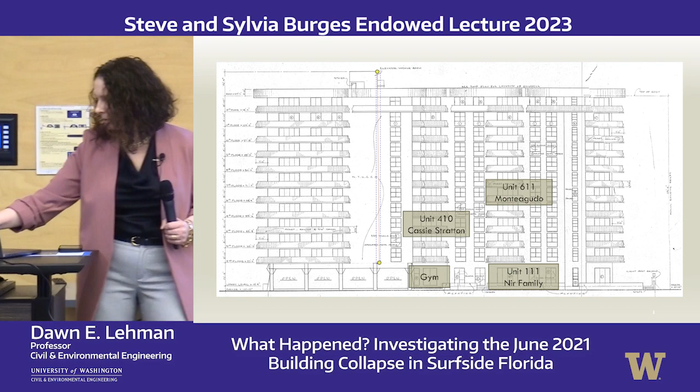Around 1 a.m. in the morning, the Nir family had just gotten home. They were a particular sect of Orthodox Judaism, out celebrating the high holidays. When they came home, they were hearing some strange knocking noises. Sara Nir, the mom, lived with two of her children, and Gabe Nir is one of them. The security guard also heard these strange knocking noises.

At 1:14 a.m., so they were hearing this between 1 and 1:14 a.m., there was a couple who split their time between Argentina and Miami. They're actually telenovela stars, and because my colleague Sarah Blaskey understands Spanish, she knew what they were saying. They did not want to be interviewed, so I want to respect that. But what's important is they drove into the garage at 1:14 a.m. They didn't see or hear anything, and they took the service elevator up.

When they took the service elevator up at 1:15 a.m., they got lucky because the service elevator always stops at the first floor. As soon as that elevator reached the first floor, they heard this thunderous clap like others did, and that was essentially when the pool deck collapsed. You can see this is the tower, this is where the people live, and this is the pool deck. These red dashed lines indicate the extent of what we can see, which is important as we try to understand what happened. We don't exactly know what happened as we move towards the tower because that's where the rubble pile is. At this point the pool deck fails, and Gabe Nir and Chani Nir, who are in Unit 111, actually move and run out.

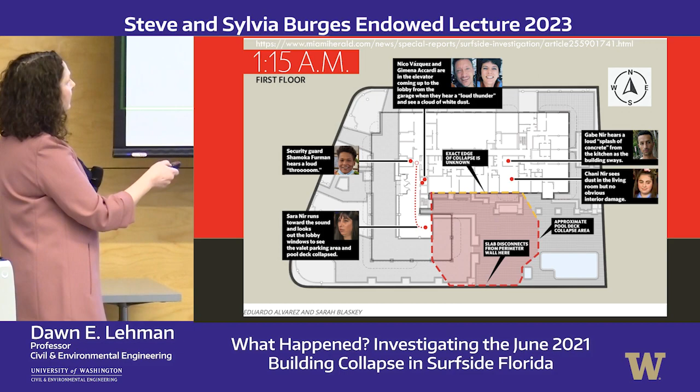The security guard hears a loud boom. Then Sara Nir, who was talking to the security guard to try to figure out what those knocking noises were, runs south, and she comes to a place on the first floor where you can see out, and she saw the pool deck collapse. You can see everybody on this first floor who heard this exit the building.

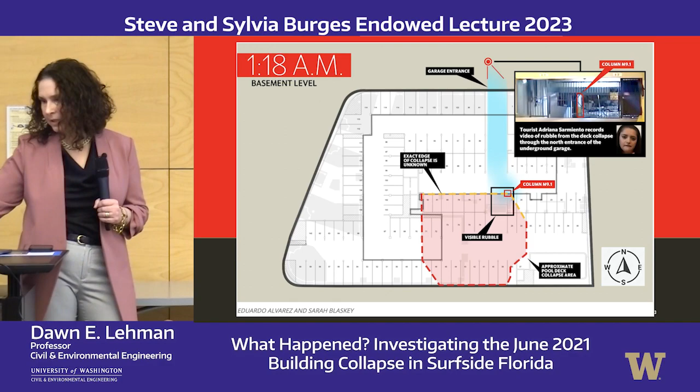Then, to confuse all of us, there was a video -- I think it was on TikTok, but I can't be sure. Social media has become incredibly important for these journalists. There was a woman just to the north at a hotel who had taken out her iPhone and took a video into the garage. You can see what looks like water, and concrete rubble on the ground. Until we understood this collapse sequence, we thought that maybe that had actually failed before the pool deck failed.

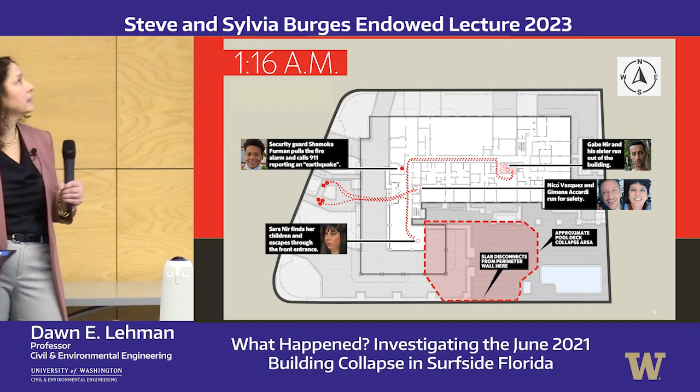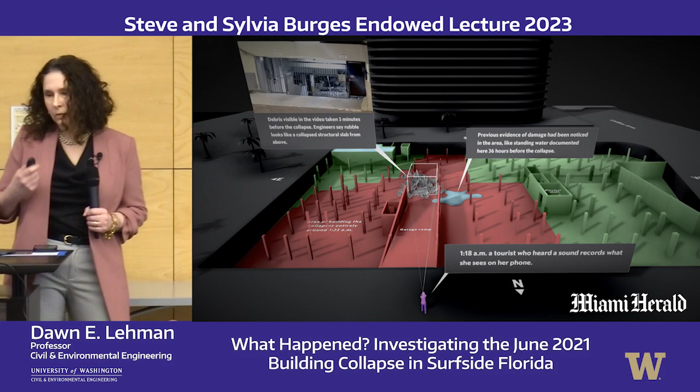At 1:16 a.m., as they leave -- this is essentially looking into the building, from the Herald. You can see that rubble we had seen before. Over the years there had been a lot of reports of water intrusion, which is going to be important when we start thinking about how that impacted the failure modes.

At 1:20 a.m., Cassie Stratton, who was on the 4th floor in that tower right above the gym -- which is going to become important -- called her husband to say, 'Oh, I'm so glad that we didn't leave our cars in the shop because the pool deck caved in. There's a sinkhole.' I think that's a fair way for a layperson to describe it. What she told Mike Stratton was that as the pool deck failed, it was coming towards her, which is also important.

The other thing we learned when Sarah and I talked to Mike Stratton is that there was a building just to the south of this building, with an easement between the two buildings, and that sprinkler or irrigation system kept watering this portion of the pool deck. So it was just to the south of the pool deck, but it was watering the pool deck. Again, this whole concept of water intrusion through the pool deck is going to become important, especially as we try to understand what might have happened.

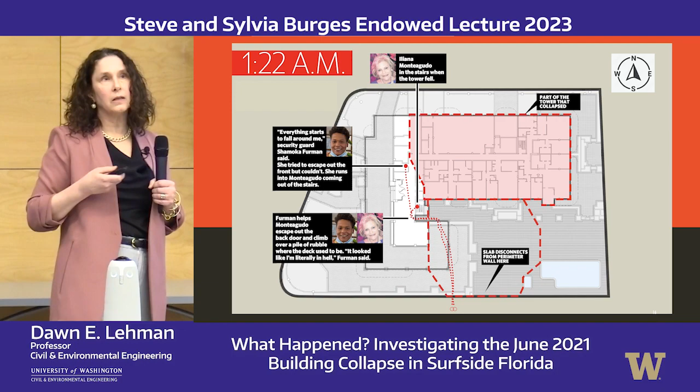Then at 1:22, two minutes later, the tower collapsed. It collapsed through this portion of the building eventually, and the whole eastern tower collapsed. The western tower remained intact. There's a structural wall here -- I'm sure most of you know what a structural wall is, but if you think about something very wide, high, and thick, that wall can provide quite a bit of stiffness, especially with wind loading, which is important in this region. So that wall remained intact, but the rest of the building failed.

There's another wall that we'll look at in a minute. You can see that when the security guard helped Ms. Monteagudo leave, they couldn't actually get out the front, and they had to weave their way out.

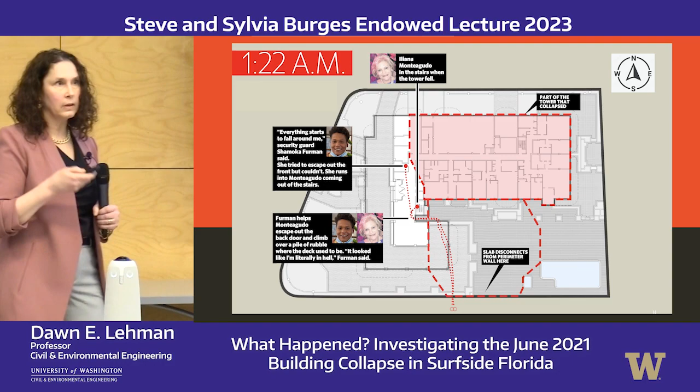And that also becomes important as we look at damage in the building. I've put this up here because this is not an engineering aspect, but it is an unfortunate truth of this tragedy, which is that because the security guard was not trained in using the alarm, and we know there's 7 minutes between when the pool deck collapsed and when the tower collapsed, most likely people's lives could have been saved. If you heard at all about the lawsuit, a part of the settlement was with the alarm company. I just want to point that out.

If you're interested in learning more about any of this, the Herald really has done a great job on that.

Okay, so we have a timeline. We know that there were 7 minutes between the pool deck collapse and when the tower collapsed. And we know when the pool deck collapsed, it was moving towards the tower, not away from the tower. So I still haven't told you what happened. You still don't probably have an idea what happened. We're still sort of here, right? Except that we know that this pool deck collapsed first, and it progressively collapsed towards the tower.

So in order for all of us to think about these things, I want to use some information that I know, and anybody else in this room who's a structural engineer and understands reinforced concrete knows. This happens a lot after earthquakes, and a lot of you might know I have done most of my research in earthquake engineering. It might have seemed strange that I decided to take this on. But one of the things is, I studied this building with a colleague of mine who's here, Laura Lowes, and we tried to understand what happened to this building.

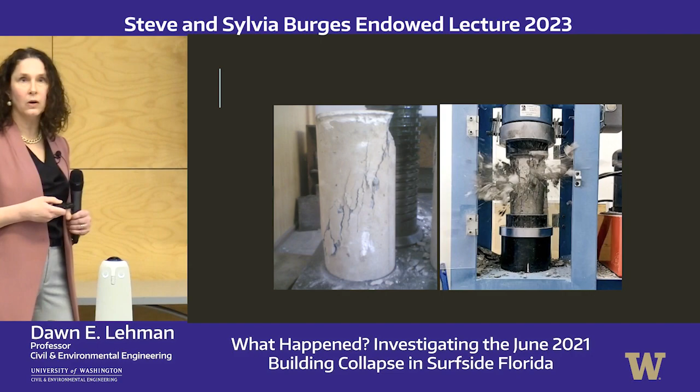So the first thing we know about concrete is that it's good in compression. This is a cylinder—we like to test concrete cylinders to figure out the strength and the stiffness. One interesting thing here is, in addition to these vertical cracks, you can see there's this diagonal pattern, and that will become important. The other thing to know is when concrete fails under a compressive load, it can actually be quite explosive. So we don't really want that to happen.

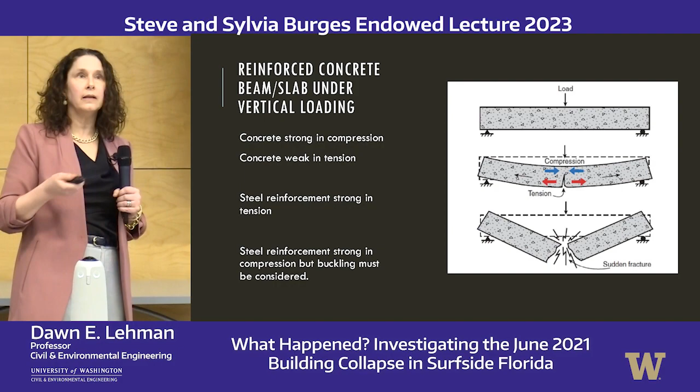So what should we do? Well, a lot of times we like to use structural members so that they carry load. For example, this roof—somebody needs to be able to design this for the load we expect, especially the dead load, which is the self-weight, anything that we know is going to be in the structure permanently, and live load, which are unexpected weights: furniture, people, equipment, etc. So we tend to have something that spans between maybe 2 columns.

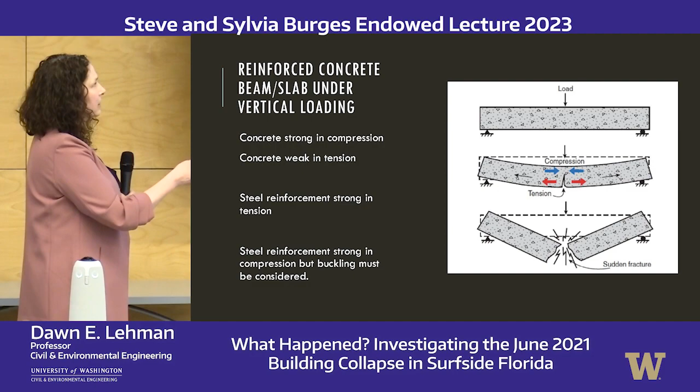It has a load on it, and the top here is in compression, and the bottom's in tension. It's not always that way. But as we said before, since concrete's not good in tension, it'll just break through. So what we do is we consider how these forces are being carried, and we actually place steel where the tension demands are. You can see here, this is a beam being subjected to that same point load. The compression forces are at the top, and you can see there's some damage here. But in the tension forces, you can see there are these cracks that are vertical, and we place the reinforcement here to take those forces and also to keep those cracks closed. And that's also important when we think about corrosion.

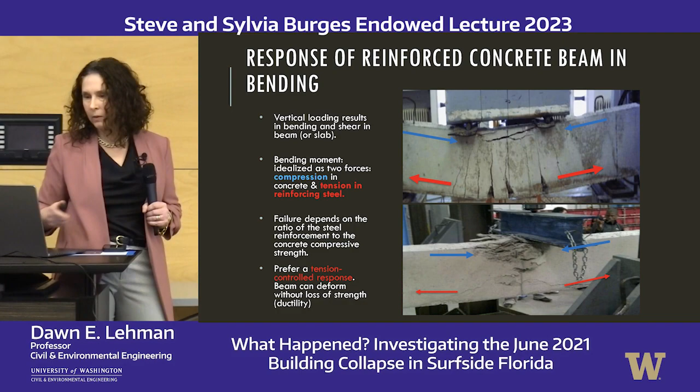If we had so much reinforcement, such a huge area, really strong, then we might end up actually changing our failure mode to compression, and we don't want that. So in general, anything that's bending, a beam, a slab like this, we will see cracking, and we'll place our reinforcement to sustain the tension.

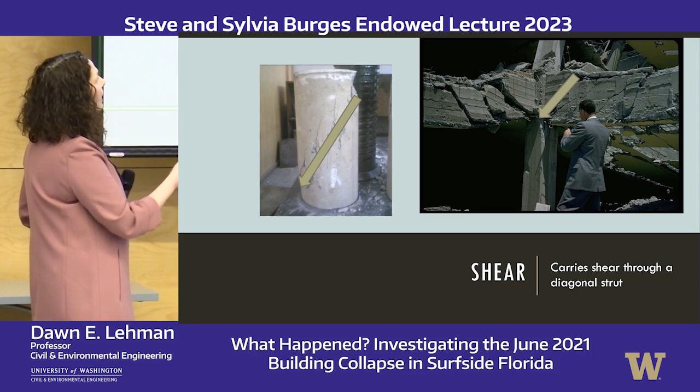The other aspect of concrete that really is not welcome is shear. I talked a little bit about this diagonal strut, because one of the ways concrete carries compression is through strutting action. You can see here, this is a column that failed after an earthquake, and you can see these diagonal cracks that are very open. But you can't carry tension perpendicular to the crack because the crack's open, so you need to carry compression along the crack. That's how we carry shear in concrete typically, which is also going to become important.

The last thing I want to talk about is bond. What is bond? Well, if I have concrete and I put steel in it, I need to transfer those forces between the steel bar and the concrete. If you've ever seen a reinforcing bar, you might see that they have what we call these deformations. Those deformations are there to transfer the force from the steel into the concrete and vice versa. So it's almost like another material. The concrete has a strength, the steel has a strength, and the bond also has a strength.

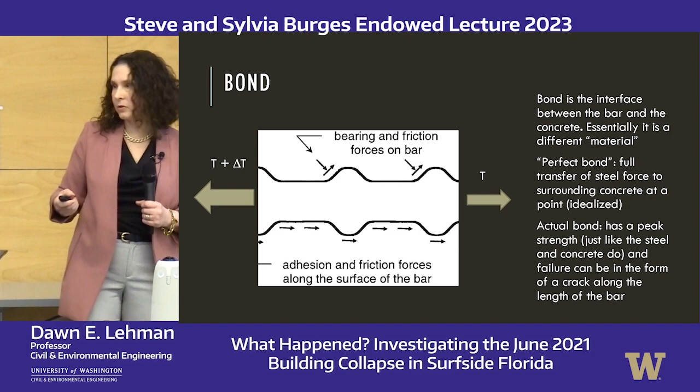And if you have high bond demands, you will run into trouble. So you need to have bars that are long enough that allow that transfer to happen. And maybe if you start running a lot of water through this slab or this beam, the concrete properties might not be what you assumed in your original design. Now, I don't know that, but that is possible.

The other place we need bond is when we want to fully anchor this bar, right? So maybe you've seen after an earthquake, we will have vertical bars from a column going into a foundation, and if those bars aren't long enough, they will just pull out and allow that to move over. So these connections are going to become important.

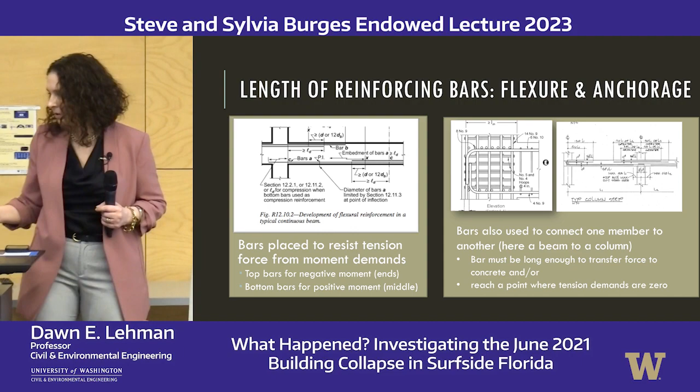So, compression: concrete's good in compression, stiff in compression. Tension: anytime we have tension, we really want to have an orthogonal bar to the crack to take those stresses, keep those cracks closed. Also bond, making sure that the bar is long enough to fully transfer the force from the bar to the concrete, and also shear, which concrete likes to carry at an angle. There—everything you need to know about forensic engineering of concrete, right there.

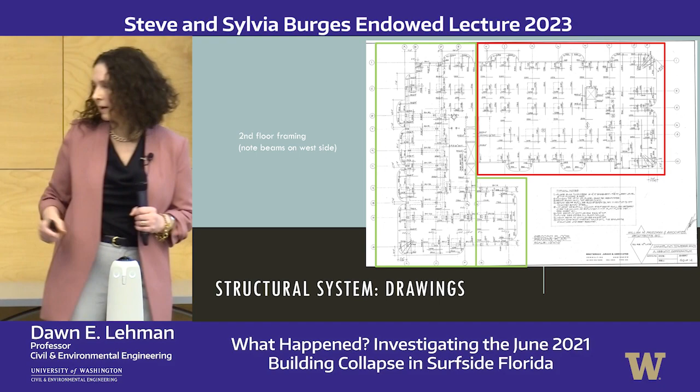What kind of system is this that's holding this building up? Well, it's called a slab column system. It's essentially a flat slab—I'm showing that above, and a column below, in a drawing and a sketch.

In addition, sometimes we will use beams. These beams help to strengthen, but they also help to stiffen. Have you ever been in a building, or especially sometimes at the airport, and you can feel the floor vibrating? Turns out people don't like that. It's not going to fall down, but people just don't like that—they don't like to feel the floor vibrating. So a lot of times when we design something like a slab, we actually design the thickness to make sure that we don't have those kind of vibrations.

So not everything is designed for strength. But typically, when we design a slab column system, we want the slab thickness to be a function of the bay width—that is, the width between these two columns—because if that gets longer and the slab is still thin, it's going to deflect and it's going to crack. Those cracks are going to open.

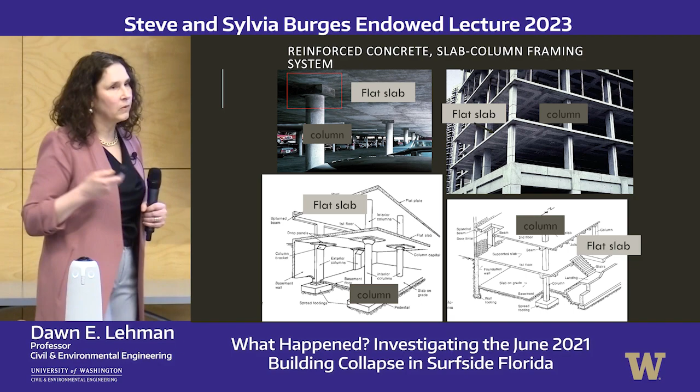Doesn't necessarily mean the building's going to fail, but it's not going to be serviceable in the long term. So sometimes beams can help you. The other thing is that we know slab column connections can be weak, so sometimes we'll put additional reinforcement and concrete around that in the form of what we call a capital. That didn't happen in this building. So it is a slab column system, and there are some beams, but not that many.

This is a drawing. I'm sorry if this is the first time you've ever seen a structural drawing, but this is a plan of the building.

It shows this exterior wall. This exterior wall is a perimeter wall, a retaining wall. It keeps the soil out—sorry to the geotechnical engineers, we just don't like soil in our building. So we have this retaining wall, and that's going to become important.

You can see I've shown this southern retaining wall in blue. That's one of the most important components for us to look at. This is the core wall I was talking about before. You can see it's in the north-south and east-west direction. There's also a stairwell wall in the north-south direction.

These columns are larger—this is in the portion of the building that remains standing. They're 2 feet by 2 feet. These columns that are just supporting the pool deck are smaller, and that's what we'd expect, because these columns are carrying a full building on top, while the pool deck just carries its own demands. Remember, there's a garage underneath there, so those are just one-story columns.

Now, there are some larger spans, anywhere from 23 to 28 feet. I will say these clearly are not the drawings that were used to build the building. How do I know that? Because this is not what the pool looks like over here, and there's no jacuzzi.

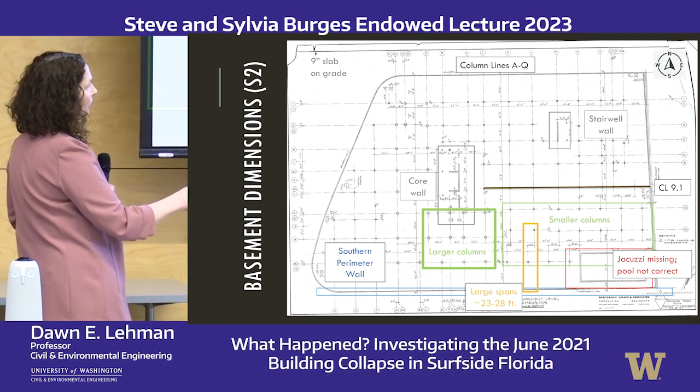And this column line here, 9.1, is very important. We know that because it's framing the perimeter of the tower to the south. So this is the delineation between this pool deck region that we know failed first and the tower itself. Those are the important aspects of this.

I'll refer to that column line, 9.1. I might call it the perimeter beam because there is a beam there. Like I said, these slab column systems do use beams.

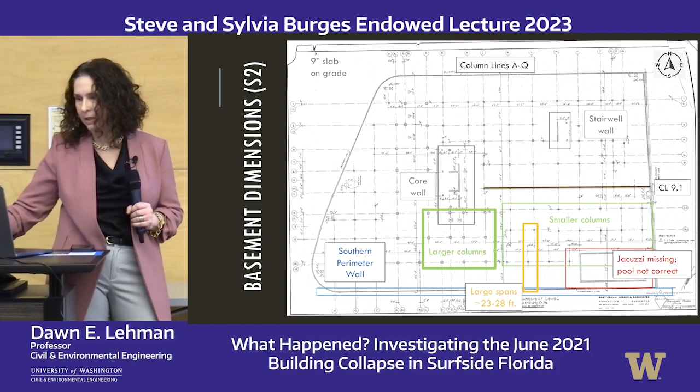This is the level we're going to end up focusing on—level 1. Why am I focusing on level 1? Because that's where the damage initiated, and also that's where I can see structural components, unlike the rubble pile where I really can't see much at all. Again, the column lines are the same, and this is the region of interest where the pool deck failed.

This is a 9.5-inch slab, and I will tell you that a 9.5-inch slab is not thick enough for these spans. So just out of the gate, without checking anything or doing any fancy analysis, we already know this building is under-designed—and I'm sure every engineer who went through knew that too. But it's not easy to thicken a slab in an existing building.

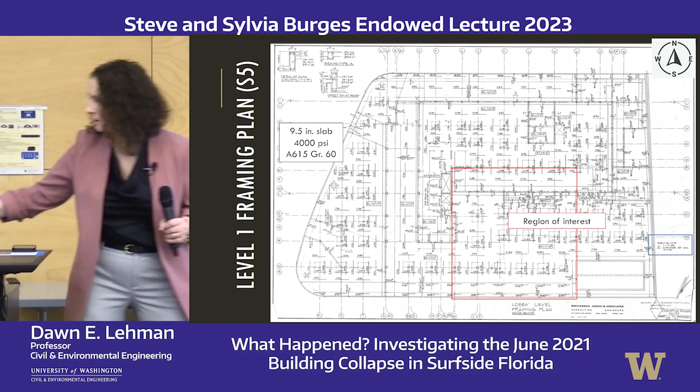The other aspects that become important for us are the connections. Remember when I was talking about bond—we want to anchor these connections. One interesting and important thing to note is this slab is actually connected to this exterior wall intentionally. Whether or not they actually used it in their analysis, I don't know. This building was built to a 1977 code. Clearly things have changed since then.

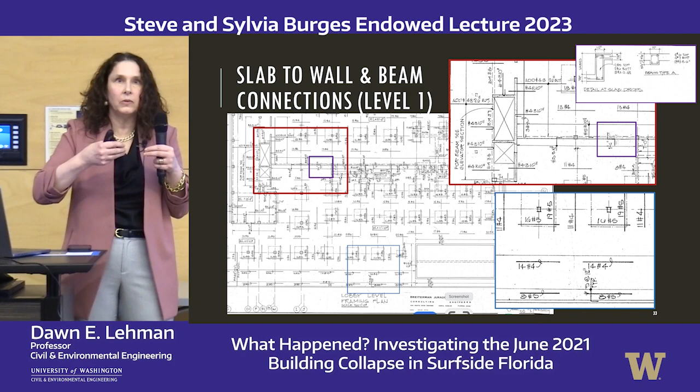You can see here there's a big square around the column. It looks like that might be the capital, that thickening I talked about before, but that's not actually what that is. That's telling the contractor that the reinforcement denoted within that square—25% of it—should go through the column each way. That's really important to connect that slab to that column. So these connections are important for us.

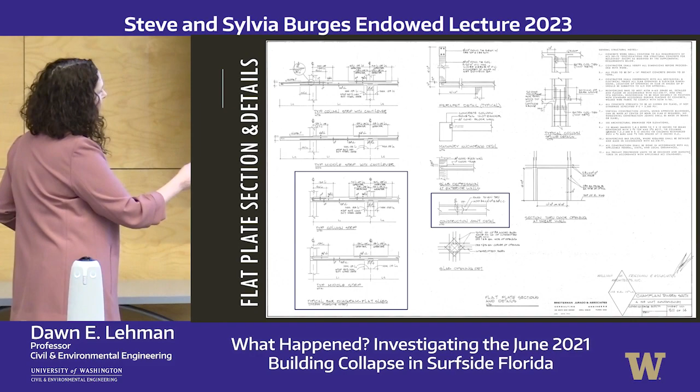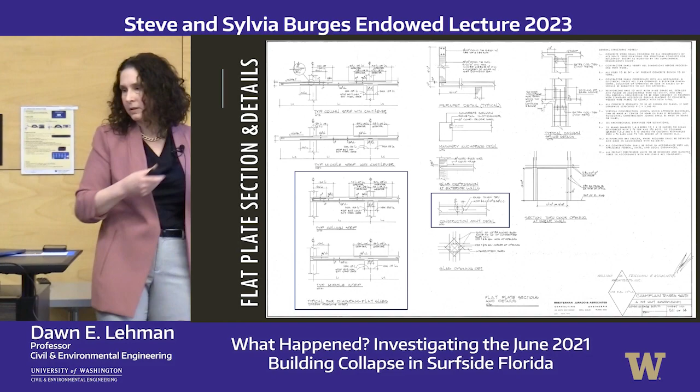This is just a detail of the connection. You can see here, this is the slab connecting to either an exterior wall or a column, and you can see that they've hooked that bar. They hooked that bar so that we have that anchorage—so if something happens, the slab will still stay attached to the column.

Okay, now we're going to get into the interesting stuff. Now that we're all educated, all at the same level, we all know how to do this. So the first thing we want to do, now that we understand the drawings, is look at the building.

There were so many people during the height of COVID who were called in to do a rescue effort.

The same thing is happening in Turkey right now. Structural engineers are very integral to being able to take apart a debris pile so that the people doing it remain safe. I'm just very grateful to those people for doing that.

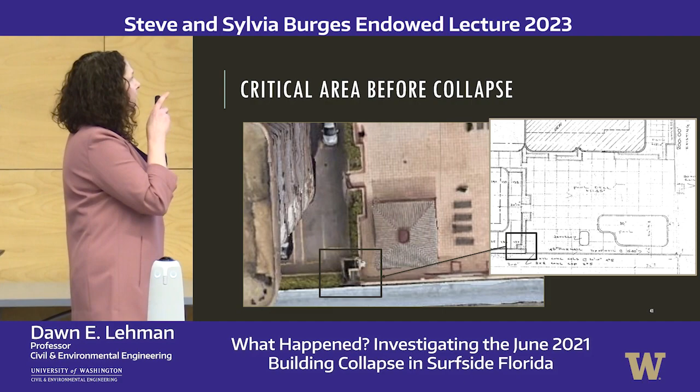Okay, so here's where we really want to start trying to understand what possibly could have happened. Notice here, and this pool - I don't know if you read about the pool, people said the pool's corroded. Was the pool corroded? Yes. But the pool's still intact, and this whole portion of the pool deck is still intact. This portion of the pool deck collapsed, even though the connections here and the connections here are the same connections. So it can't just be the connections - something else must have happened.

If I look at it from my point of view, having gone through these photos a lot, I see that the slab has detached from the southern perimeter wall, so that continuous connection has failed. There's a strut - remember how we said concrete likes to carry forces through struts - so it's strutting to a wall in the jacuzzi, which does have a thick wall. That angle continues until the extent of the damage region runs north-south, and I think there's a construction joint there. What's a construction joint? I forgot to tell you that.

Okay, this is the bonus in the class. So a construction joint is when you cast part of a slab - you're not going to be able to cast the whole thing at once, and you want to cast the next part, so there's a joint between those two castings, and usually we put reinforcement through there. So we will look at that.

You can also see all of these white ellipses - those are columns sticking up through the slab. Remember, there's a garage underneath here, so that slab has fallen. It probably hasn't fallen all the way down to reach the floor of the garage because this is Miami, right? These people like their cars, especially their white cars. So one of the reasons they make this site big is that they want to have a parking space for every unit. And over here, I can see there's this brown paint - this color is all over Florida, I don't know what to call it, but they seem to like to paint everything this brownish, pinkish color. So that's above level 1, and this white part is below because that was part of the garage.

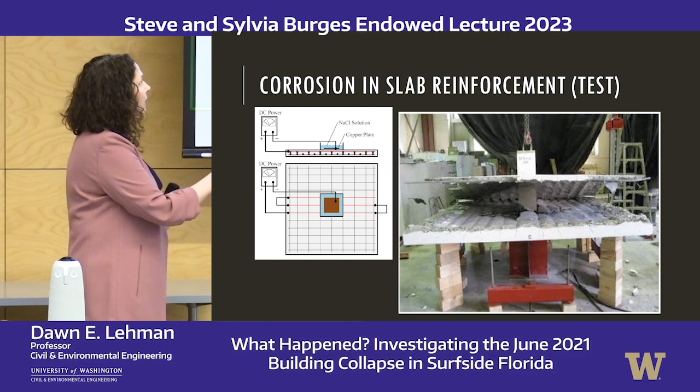Now I'm going to try to incorporate a little bit of testing to show what happened. Somebody took a slab in their lab and built themselves this basically salt bath, and they corroded these bars. When they corroded the bars, you can see what it looks like—there's essentially a failure plane, a horizontal failure plane, because those bars were corroded. Same thing here, might be hard to see.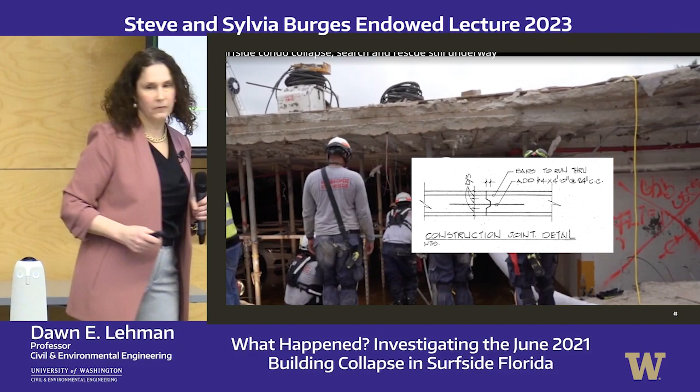So it does seem that there's the potential—and this is the other side, the western extent—and again you can see that same sort of damage mode where these bottom bars have pulled out. One of the things we do in reinforced concrete is put a concrete cover beyond the bar to prevent corrosion. Unfortunately, when this building was built, the cover required within this garage was only 3/4 of an inch. It was not enough to keep these bars intact and prevent them from corroding.

The last thing I want to talk about here is this connection—this is a pretty well understood damage mode where the slab has detached from the column. This is just an example from an experiment, and you can see when they cut it apart, there was this diagonal crack that we had talked about before, right? Compression—concrete likes to carry compression through that crack—and then this horizontal crack, which is sort of like a plane of weakness. So you can see there aren't any bottom bars here, so there's really nothing to keep that slab connected except potentially the bars. But you can see here that, again, there are bars attached to the column and they slipped off.

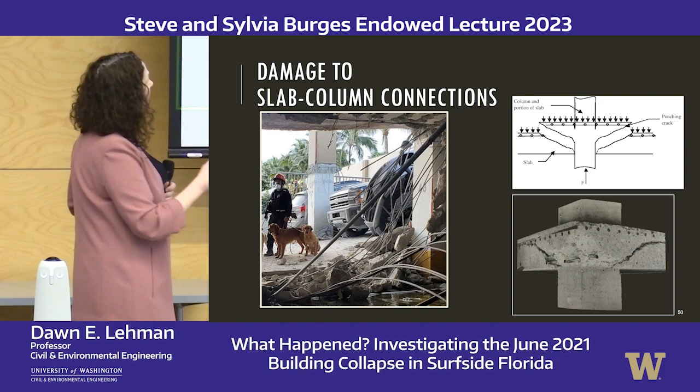The last thing that was really important to me, and that I spent so long looking at, was this southern perimeter wall and the damage along the wall. Because I know that if you have a connection and that connection has the same properties, the damage should look the same all the way along the length of the wall—but it doesn't look the same at all. Here you can see part of the wall is missing, and it looks like there are chunks of concrete. When I go over here, it looks like there's gravel. There is gravel, because there's gravel in the easement that's just to the south.

So these are the things that we ended up focusing on. This is an image from the Miami Herald looking at these columns that have poked through, and also trying to understand what happened in that wall region.

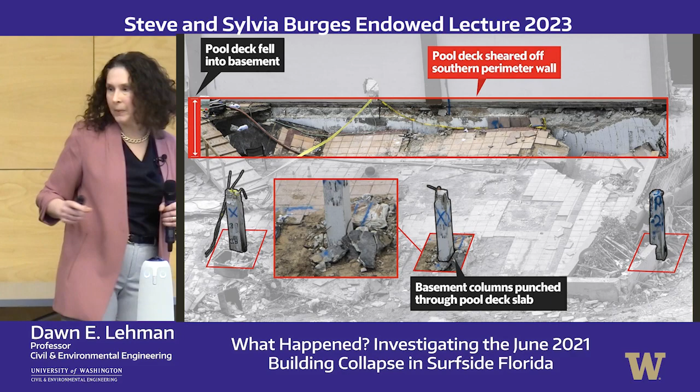This is an image from the Herald where you can see that here there's just a vertical shear plane, and as we move west, we see a different type of damage. Here it looks like somebody came in and added reinforcing bars, which is what I think they did. And as we move along, you can see that the gravel that's in the easement is exposed.

On the right is a slab wall connection test that I showed to illustrate the kind of damage we would expect here: just this vertical plane of damage between the wall and the slab. So we can see that's what we would expect, but not the kind of damage that we saw before.

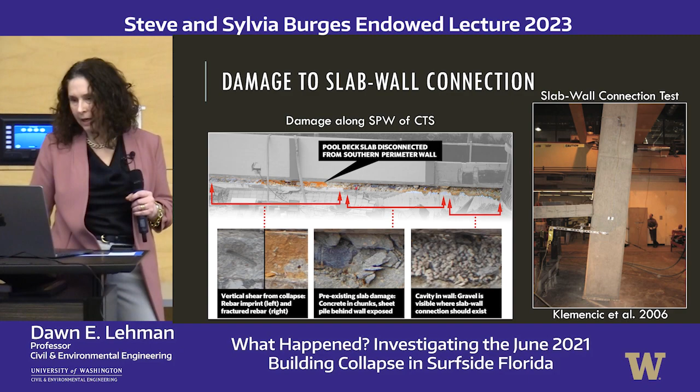The last thing, somebody, I don't know how, flew their drone on this site after it was cleared. I'm thankful for it because this really gave me a better understanding of this wall. And so here is the area, like I said before, that looks like somebody came in and cut in and replaced some of the reinforcement.

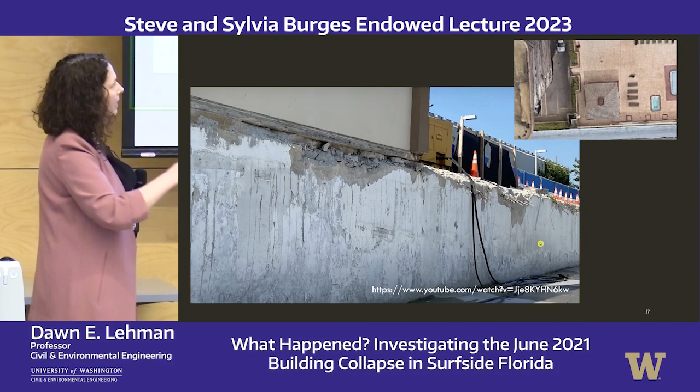You can see these areas where it looks like the slab reinforcement had fractured and then just distressed the paint on the wall. You can also see here there's a different damage pattern where these reinforcing bars had pulled away.

So one of the things that came out after Nikki and I had done our modeling is that through discovery, they found that the contractor apparently didn't care about that wall. So it does lead to the idea that perhaps somebody damaged this wall, maybe during construction of the 87th Park building, and that might have been why we saw the full failure that we did, because that connection wasn't intact.

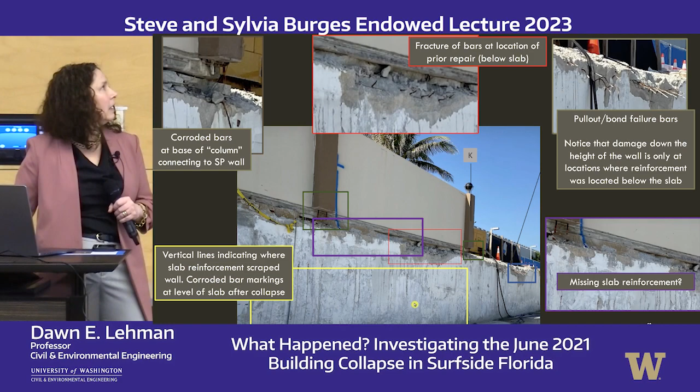And this is just a description of what I've been talking about to date. Okay, so I want to end. Now this is like PhD level work.

So I want to end with, how do we understand what happened now that we've seen all of that? I came in to this not to model the full building, not to model the full collapse. That's what NIST is doing. What I wanted to answer was, how does damage in the pool deck 60 to 80 feet away from a building result in damage in the building? It seems like I damaged the pool deck, it shouldn't be impacting the building. And so that's really what Nikki and I focused on.

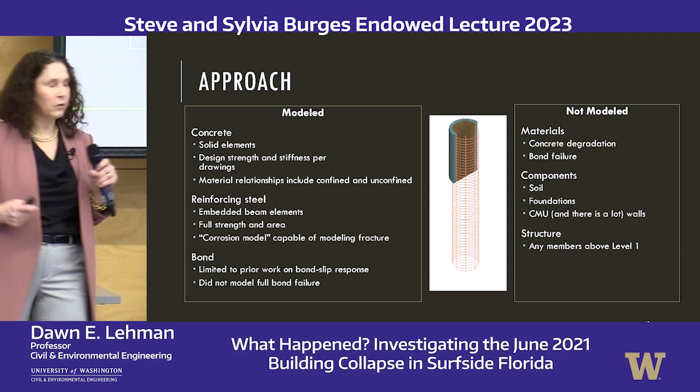This is just to say we used a peer-reviewed model, and you can see here, this is a column, and there are these little squares of concrete, and these bars are embedded in those concrete cubes as their reinforcement.

Nikki really built a full model of level 1 with a very refined area where we know, basically, this is one of the eastern portions of the damaged region, and this is a western portion of the damaged region. We don't really know what's happening in the building, so we actually did a bay of that building with a very fine mesh as well.

And then surrounding it is just a more simple model. These models are very computationally intensive. We used a high-performance computing cluster, and some of them took 20 hours to run.

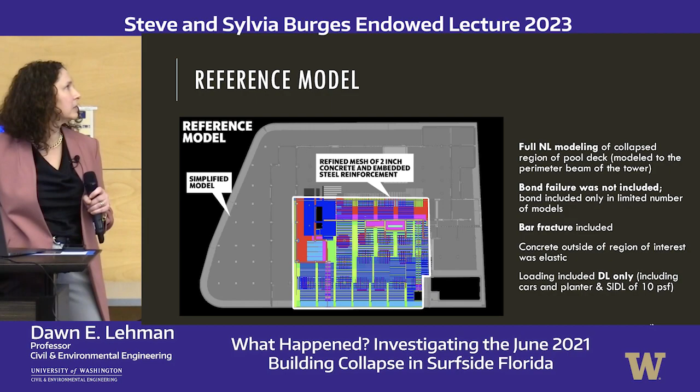So this is also an evaluation. We only put load on this level 1, as well as the additional load from the columns above, but we only put on the loads that were there. And we only used the properties that were as designed, except for one thing.

So essentially, I'm going to look at 3 different models: the reference model, the model with taking some of that steel out and replacing it like we saw in that wall, and then corroding the reinforcement. And I will try to present a couple of very simple images.

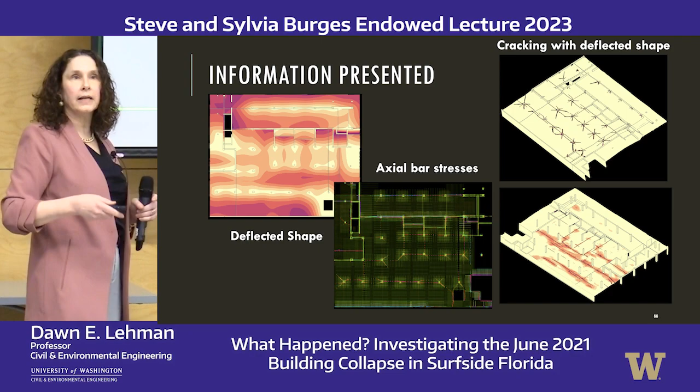So this is an image of the vertical deflected shape, right? So we're pushing down. This is the plan. This is the jacuzzi, this is the core wall, and that's the edge of the building. Each of these colors, as they get darker, is a higher state of deflection. Remember the bars we've been talking about a lot, that we need to connect one component to another, to take the tension force, to keep those cracks closed.

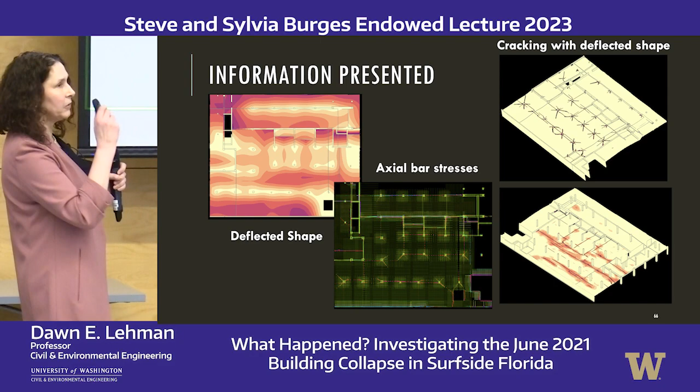We also want to look at what the stresses are in that. And then we also have the crack pattern at the top of the slab, and this is at the bottom of the slab. You can see these columns here, and this is as if you were in the garage looking up.

So this is what the Herald did with what Nick and I were looking at - they're fine, but the Herald had to color them pretty. Essentially, this is what we saw at the as-built. And if this is actually as-built, it's hard to say.

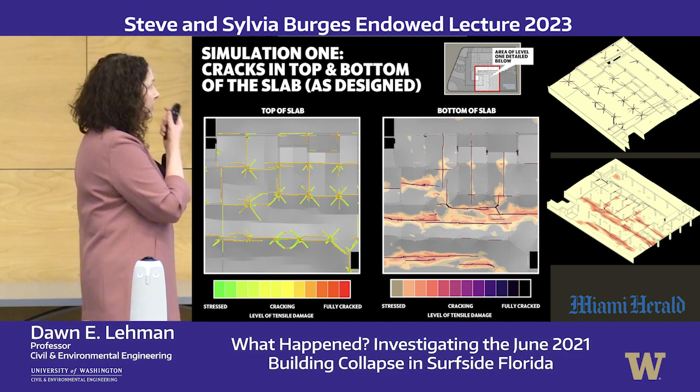But you can see we have a lot of cracking around the columns. This is exactly what we would expect - concrete is going to crack under load. So the fact that there are cracks is not the issue. The issue becomes when the cracks are too large or the system has degraded.

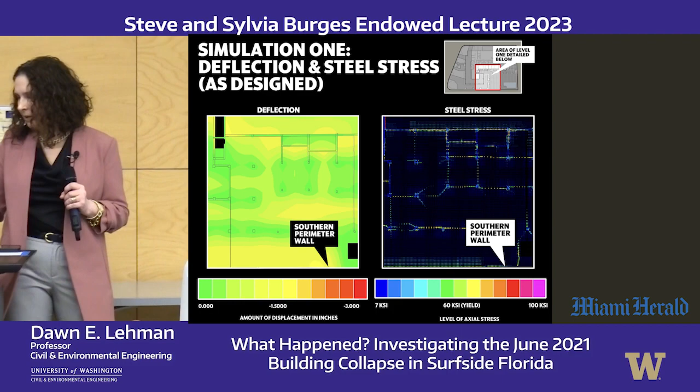The other thing we would like to look at is what's going on with the steel. The steel yields at about 60 KSI, and you can see that there are bars just under dead load alone, without any load factors, that are reaching yield. So this is already a very under-designed building. It stood for 40 years, but it's an under-designed building.

So sometimes people just said, well, we think maybe someone came in and took out a column - I'm not exactly sure. This is from the New York Times, and they were claiming that this column, at the intersection of column line M and 11.1, was missing. You can see where that is - it's pretty close to the perimeter of the building.

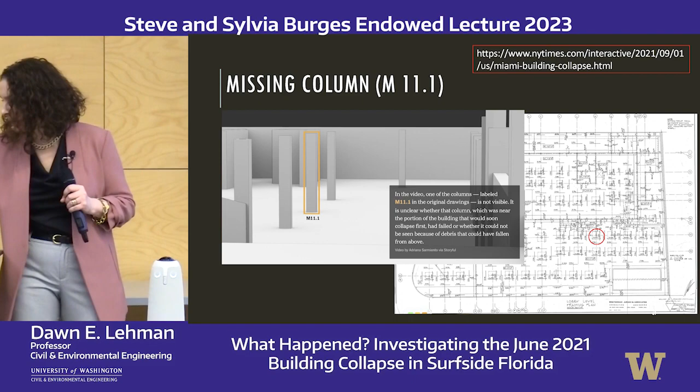What happens if you take a column out? Well, if you take a column out, it turns out that you get a lot of deflection where you took the column out, but you don't really get anything else. Remember that the pool deck started to fail somewhere here and move towards the building - so just taking the column out alone is not going to do that.

So the next thing that we did after trying a lot of different parameters is, well, what would happen if somebody actually took out reinforcement? This was before we had any idea about the contractor admitting that they damaged the wall. So Nikki and I took this column line that we had been looking at and took out reinforcement on either side, and we added additional reinforcement because we saw that in the image of the site after it had been cleared.

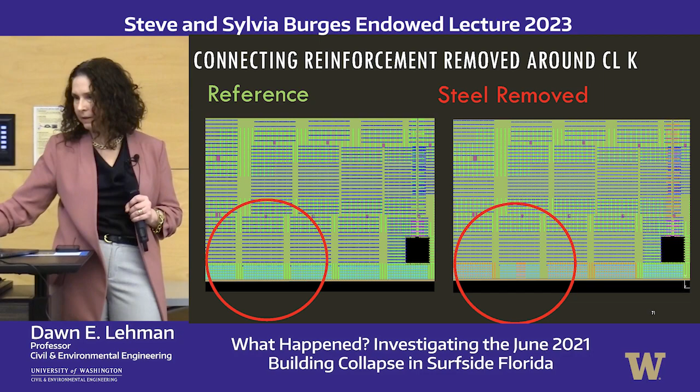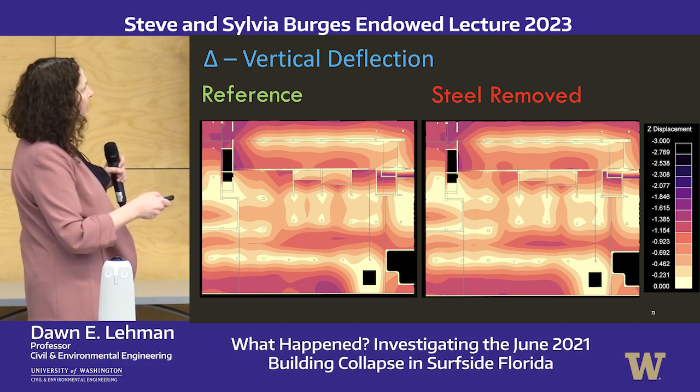This compares what the as-designed condition is to what happens if the steel is removed. You can see that there's a more uniform deflection of the slab along the length of the wall. We did also get some increased deflection in this bay relative to here, which makes sense, right - this is a continuous system. So what happens in this bay can impact that bay. That is one of the reasons that we modeled the full first story.

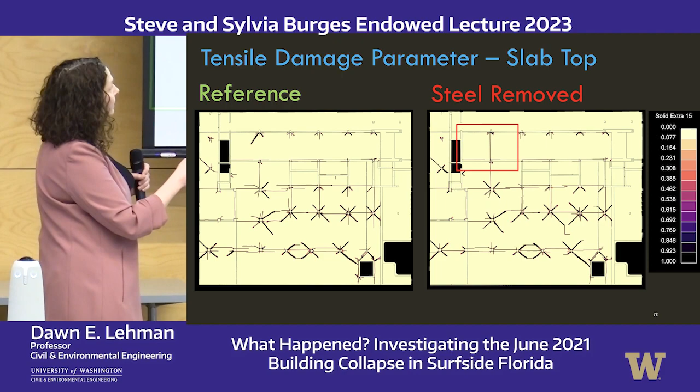This is a comparison of the tension damage - this is what we were looking at before. And over to the right, you can see that removing that steel put damage into the building, and it did it at the gym. So you can see here that, it's not a very significant crack, but it does suggest that there was unwanted cracking before the building collapsed.

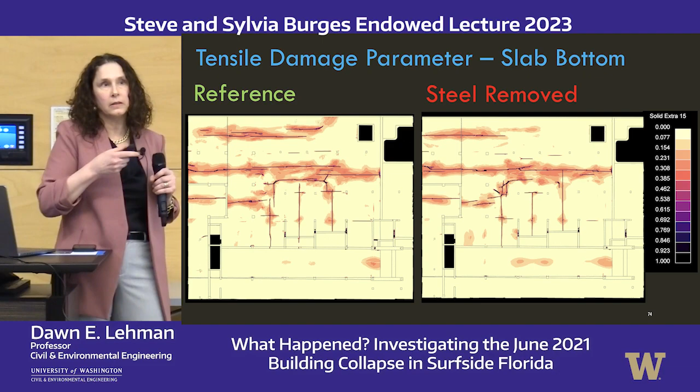This is if you were down below looking up - you can see that there is some difference in the crack pattern. But again, remember what we're trying to do is say: how does damage in the pool deck result in failure and collapse of a building? How does that damage impact what's happening in the tower?

So this is the reference reinforcement. You can see if we remove some of the steel here, the connecting steel between the slab and the wall, those bars that are connecting the remainder of the wall to the slab actually are more highly stressed.

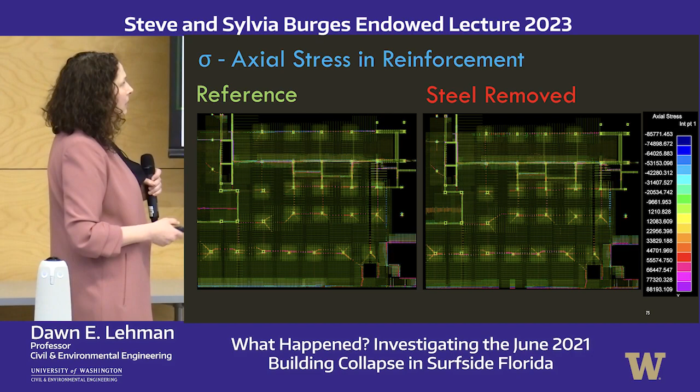So we came up with a hypothesis from this. The idea we had was that the damage started at the exterior, at this continuous slab wall connection, and then it moved north through these slab column connections. So once this continuous connection was damaged, we would increase the demand on these slab column connections, not just force, but also deformation, which could result in failure of those and then resulting in damage up into the building.

Now, a number of folks have been concentrating on the area that was in front of the near unit, and I started there too. But there are a lot of beams that are framing orthogonal to the perimeter beam in the tower here. And reinforced concrete is smart - it can change its angle as it's being deformed, and there's no reason that it would want to go through all that structure when it could just go through that flat plate and enter into the gym.

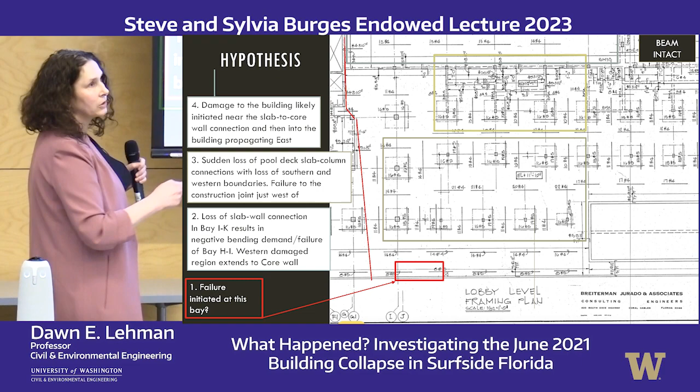So, why do I think that is also reasonable? Well, the other thing is, this is the Herald's anatomy of a collapse. But this is a structural anatomy of a collapse.

This is a really nice set of tests that were done. What this testing did was it had a slab column system, just like we're looking at, and started the damage, or essentially released the load, but damaged an exterior column versus an interior column. When they damaged the exterior column, they got collapse. When they damaged the interior column, the slab was still capable of sustaining those forces.

So what did we do? We looked at corroding the steel. Steel corrosion, as you might know, can change the area, but we didn't do that because we didn't know how much area could have been taken off of those bars since we didn't have access to the site.

But we do know that corrosion can reduce the strain or deformation. If you think about pulling a rubber band, at some point if you pull it enough it will break. So corrosion is affecting the material properties of the steel such that you can't pull it as far.

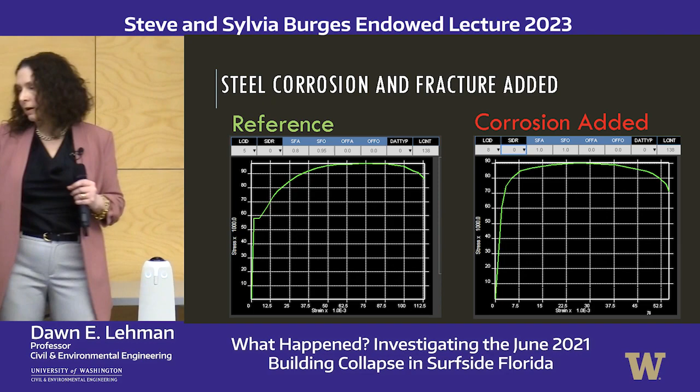It's called ductility, but essentially we've worsened the condition of the steel, and the steel is really important, as we know, to connect the slab to the columns, and the slab to the wall.

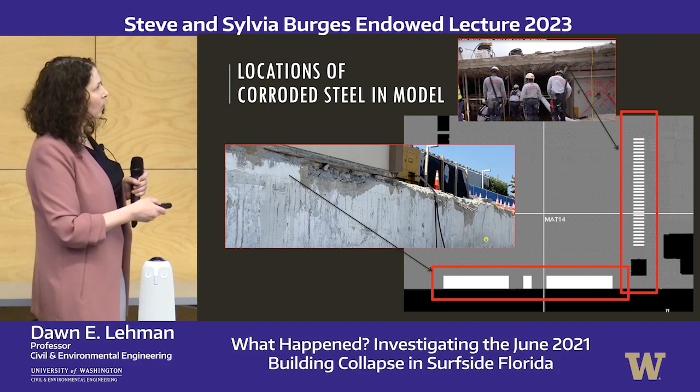We also made sure that we only included corrosion in the regions where we saw it, so at the slab wall connection and also at the construction joint. And when we do that, you can see just from the vertical deflection - this is the reference - how much deflection we have in the slab.

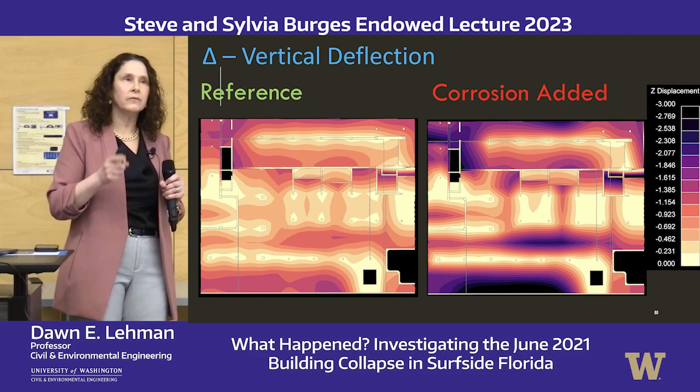Obviously this is fractured, so there's extensive deflection of the slab, but there's also more deflection in the building itself. And remember, that's all we're trying to investigate: how does damage in the pool deck result in damage in the building?

The other thing that came out of the discovery was that this column line, which has the planters, the column line we've been looking at, had damage just a number of days before the building actually collapsed. This damage was in the form of a crack in the planter.

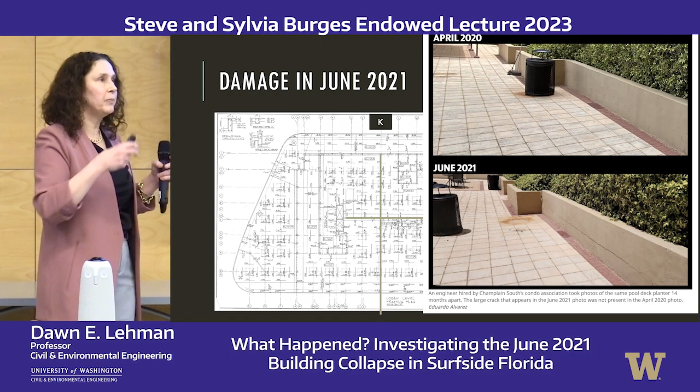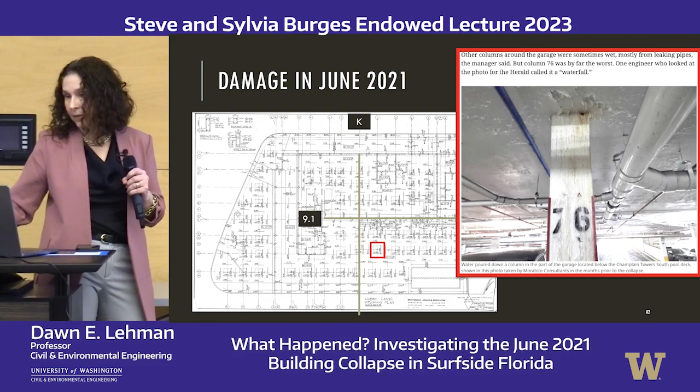This is just an image that the Herald put together so you know where we are. We're looking at that column and this planter. This is that surface level parking we talked about, where this western portion of the building primarily remains standing.

So there is evidence now that there might have been previous damage to this building that would have weakened this portion of it and allowed for this collapse.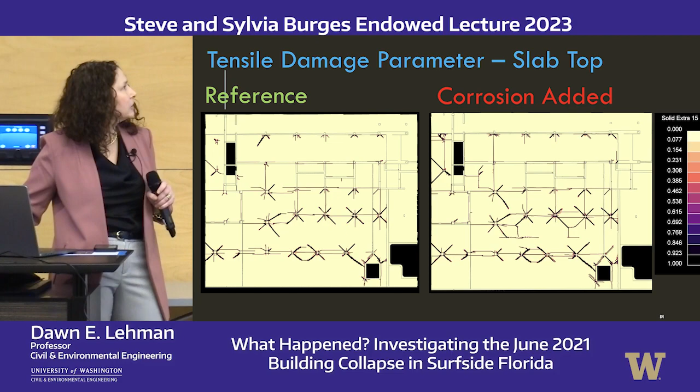This is what happens to the crack patterns, and this is what happens to the reinforcement. You can see all of this reinforcement has fractured. That's why you see much higher stresses at the slab column connection all the way into the building. So the stresses in the slab reinforcement in the building are lower than when we add this corrosion and get damage and failure of that connection.

So if any of you are really interested in this and understanding more about it, because I clearly didn't answer the question of what happened, I would encourage you to follow NIST. They have, I think the sports analogy is a dream team - folks looking at the building. They've tried to preserve as much of the debris as they could, and they were also going to test that to understand the properties of the concrete and the steel, which we know are important.

They have a great group of geotechnical engineers who are looking at the impact of the surrounding site and the soil, as well as a team looking at just the structural engineering of the system.

And we gave a presentation together. I know for a lot of us journalists, you feel like they're not necessarily listening or respecting what you're saying, but if you find the right journalist, especially an investigative journalist, I think you can actually create a great partnership. I think Sarah and I did that. She's so bright, she caught on so quickly, she was just such a joy to work with, and she pushed me. Because when she told me she wanted me to model this building, I was like, no, people spend a year doing that. We don't have - no, Dawn, I know you can do it, I know you can do it.